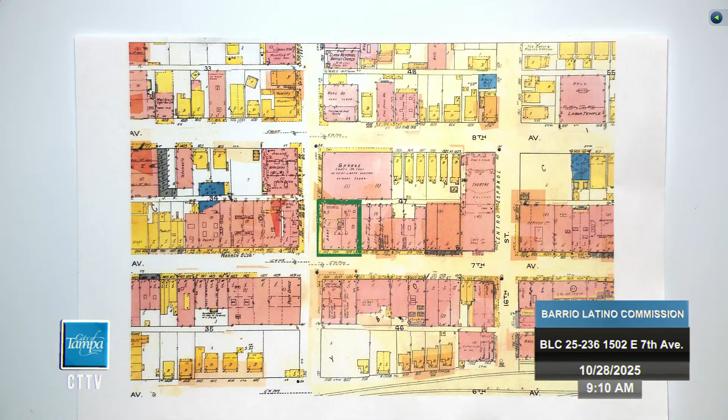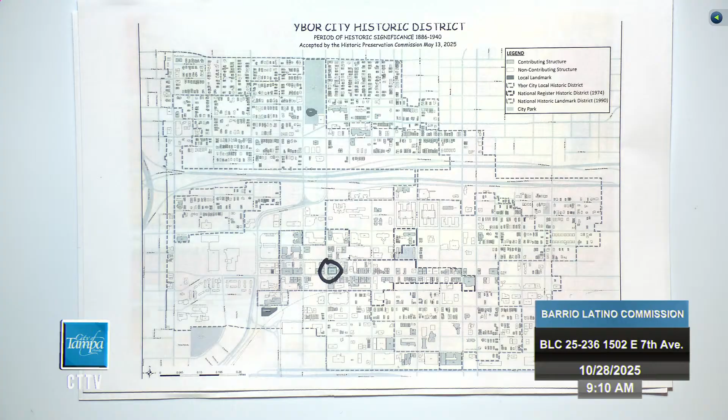Here's our vicinity map showing the concentration of the commercial core, which is highlighted in blue. Obviously, the boundaries on the outside are the local district of Ybor City. We're going to focus on the corner of 7th Avenue and 15th Street. This is just an aerial shot, you see the concentration of commercial buildings along 7th Avenue and 15th Street.

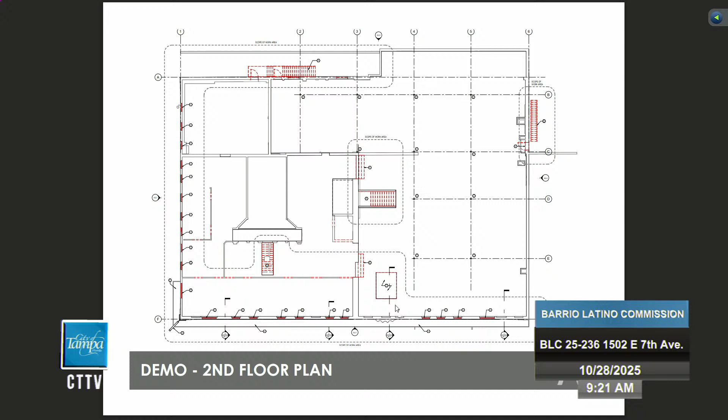The structural columns remain, but the cladding will come off. On the second floor, all the windows are being taken off and replaced. The elevator will come up, and when we go back, this is where the elevator is, right in the centerpiece.

So for the storefront, to maintain that same glass front facade, we're just going to use spandrel glass in front of the elevator, so the elevator will have spandrel glass looking at it. We talked about a lot of different colors for the spandrel glass and decided on a dark gray spandrel, because that way it just looks like that big section of windows had the lights off, rather than calling attention to it.

The entrance, so when you come upstairs, the tenants are all existing, so we are going to eat into their space, but you would come up here, go to the elevator, or go up the stairs to your space on the second floor.

The elevator comes up. The reason we chose this elevator location is very tricky. There are multiple levels of the building, so this portion right here is at one level. The original building had old light wells right here that have since been covered up, but they're at multiple different levels. The elevator being right here was just the perfect position, so we could go up to the highest level and then get a ramp down to the lower space, but it's about a 2 foot difference.

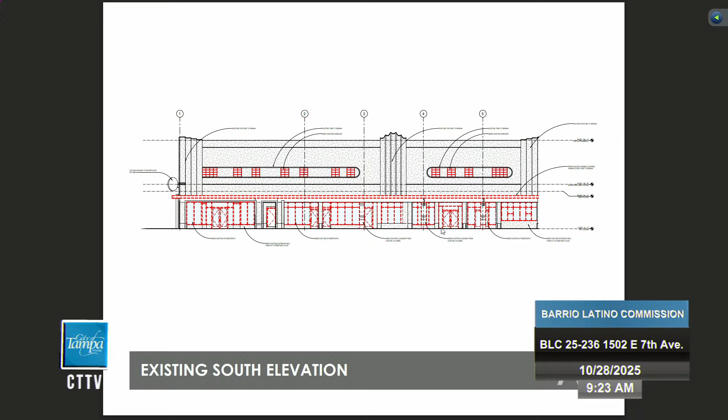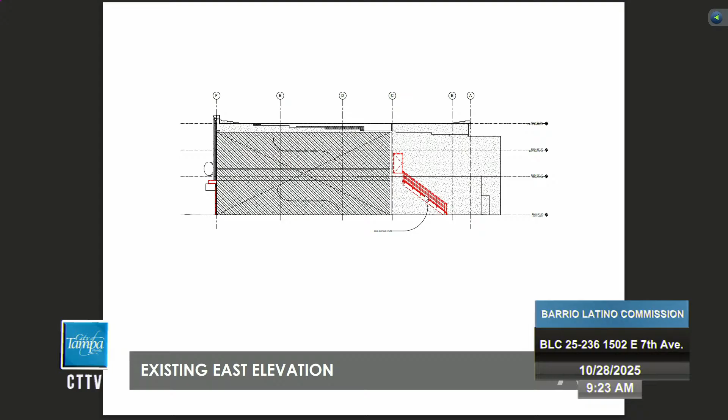We're replacing all the fenestrations with new ones because they are not in good shape. This is the building to the east of us, and this is that emergency egress stair we're going to replace. And we're going to come back to it.

These are the colors we have, and I have a whole color palette with a couple nuance changes. We are keeping the gradation in the fluted aspect, so the centerpiece of the Art Deco is actually like a curved flute - those will have the gradations. The ones that are stepped will just get a single color.

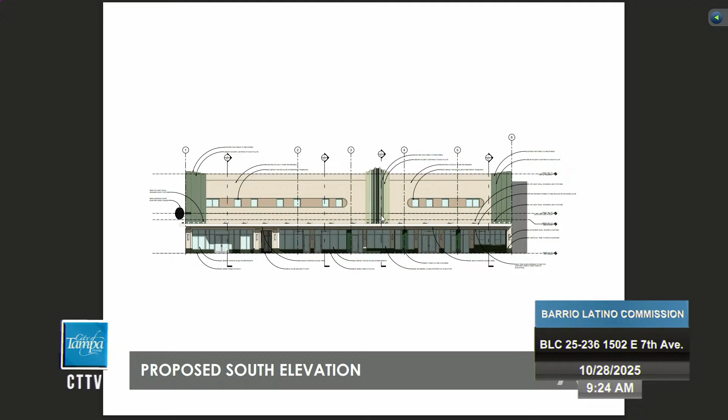We're also going to light up the vertical elements at night so you could see the difference in the steps.

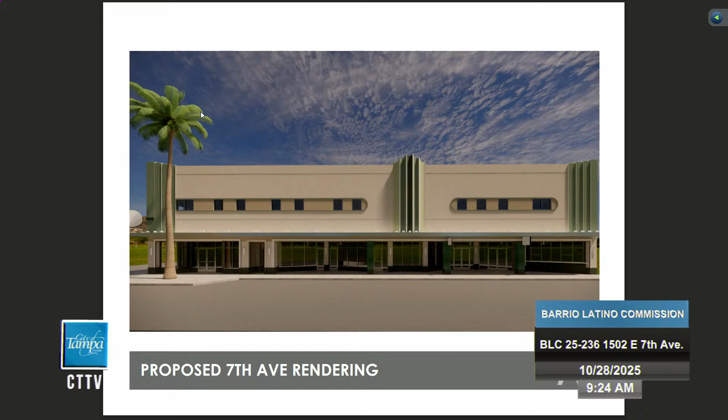And this is our proposed colors. So the banding is the same - the accent colors where we had accent colors are all going to stay the same, just newer, fresher colors, but the same kind of green hues. So the flute gets the gradation, the sides get the second color, the inset is a separate accent, and the band is the same color as the verticals.

Note the sign that Ron was talking about and all the existing signs - we're just going to take the casings off and restore them.

And then this part too, so that's the banding right here, this is the portal frames. You can see what we did as a nuance change - we put the banding all the way across. In the original design, the flute went all the way up to the awning; we're not going to do that. We're going to have the awning, and the flutes are going to stop at the trim line. The structural glass will come across, and then the stainless steel band will go across in replacement of the lights too.

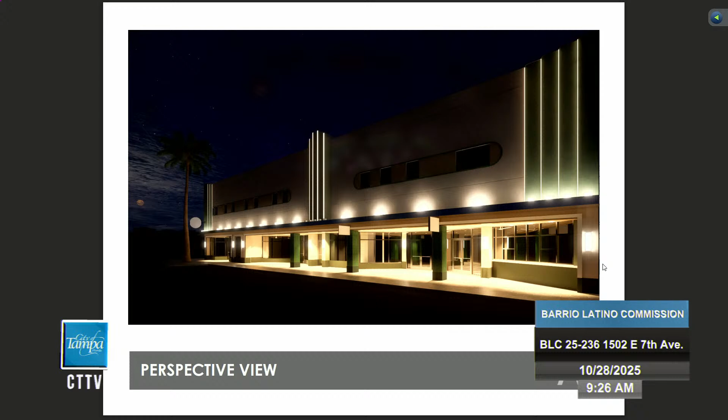And again, there's the vertical - this is it lit up at night. Part of it too is the owner thinks the alcoves at night are dark and dingy.

And when we - actually I should go back - we are going to install a security gate access right here because that is being used as a homeless bathroom. It's going to be tricky because it's going to have to tie into a fire alarm. We're going to negotiate with the fire marshal how to do it, but it's an emergency egress there.

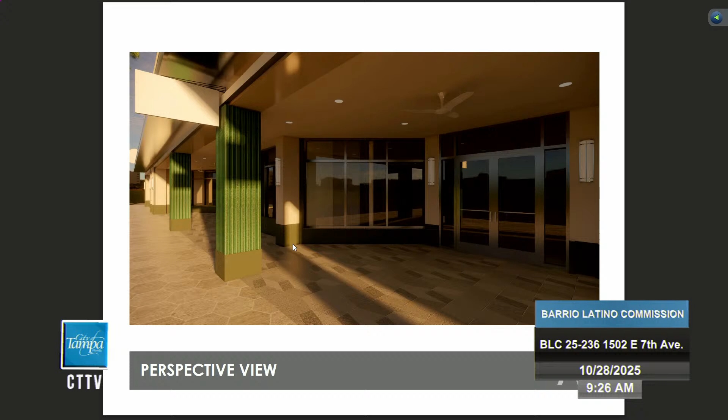However, at night there are alcoves in it and people are using them, and I'll show you that too. So this is the ground floor.

You can see what we're going to do is this is the Ybor paver here. There's a band, and then we're going to do a stamped concrete pattern that's a cubic pattern that is actually a play off of the Ybor pavers.

This flute will be replaced with a tile flute. I have a sample with me, granite base, and then we're going to redo the soffits at the top. Here this will be the banded glass. That will still be the structural glass, just with the fluted or portal frame around it.

So the elevator, this is the change we're going to make to the elevator access. This is the little security gate. There's a little alcove in the back. Unfortunately, just the way it lays out, it's not very good, and people are hiding and using it. But the storefront stays all the same.

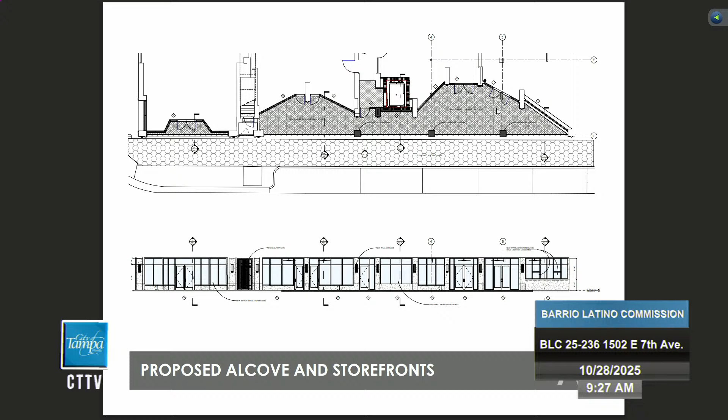Basically the same rhythm, the same pattern. So we have the top transom goes vertically across. All the doors will be consistent, clear glass. This is the pizza transom countertop.

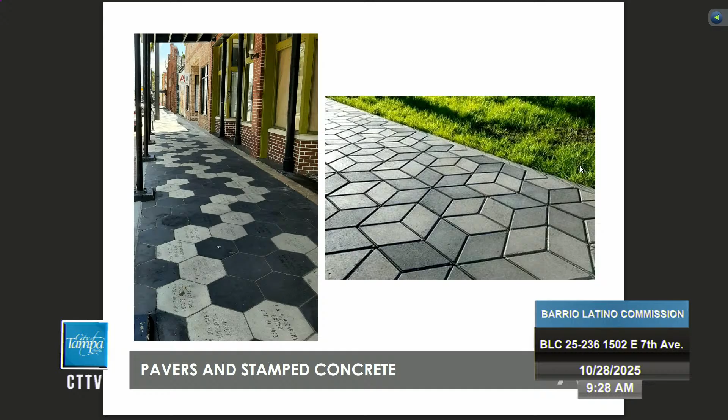And then this is the Ybor City paver, and this is the stamped concrete we're playing off of. And then when we looked around at the different alcoves and uses, this is the King Corona one. They did a white terrazzo with the band, so we have this concrete band too, and then the pavers.

Adjacent to that was one with a quarry tile, not very nice. This one, about two doors down, has another terrazzo with kind of another cubic pattern. So I feel like our stamped concrete is in line with what we're asking for.

The elevator shaft, you can see there are two levels. So the elevator goes up to the upper level. Actually, I can't remember - no, it goes all the way up to the second floor and then ramps back down to the lower level.

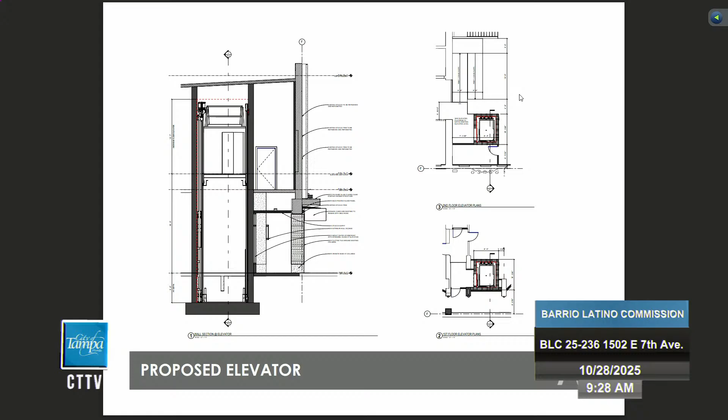And then this is the banding, that buff kind of color. It was called Vitrolite - there's another manufacturer, we don't know what it is, but it's obviously not in stock, so we're going to have to find ways. It'll probably just end up being like a back-painted glass to match or to restore it, because some of them are missing huge sections and need a lot of work.

And that's the end of my presentation.

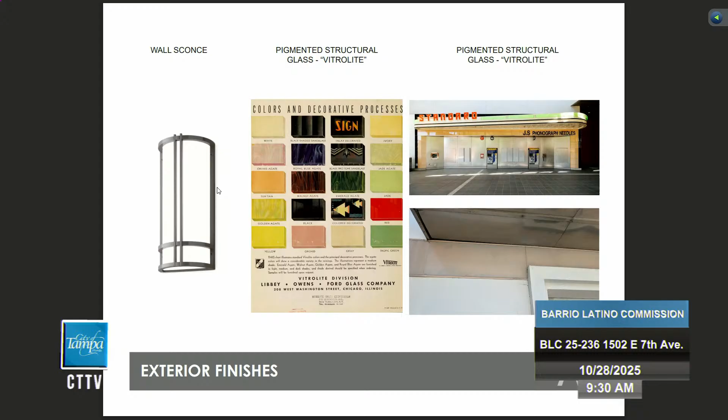On page 3 of your staff report, we have the Secretary of Interior Standards, and I just wanted to call out that this is a unique project because from the 1900 building to the 1940 building there's been a big disconnect. But through the standards, most properties change over time, and these changes that have acquired historic significance in their own right shall be retained and preserved.

So he doesn't have to go back to the 1900 building - this building can move forward per the standards. These distinct features, finishes, and construction techniques or examples of craftsmanship that characterize historic properties shall be preserved. So as part of this presentation, I think they're moving forward in that vein.

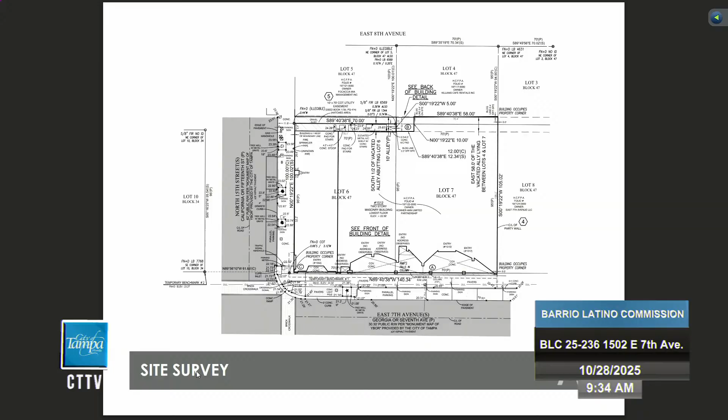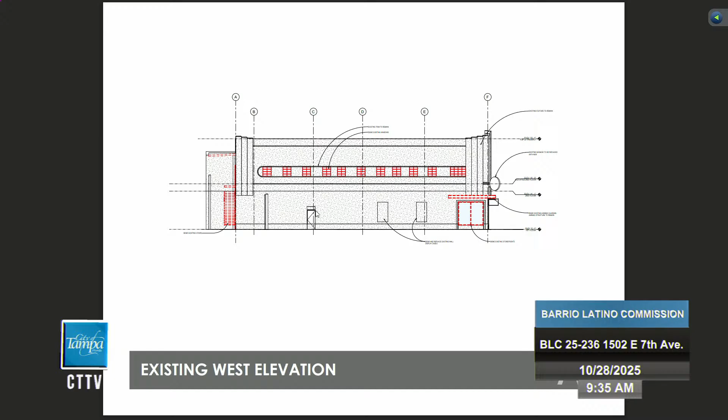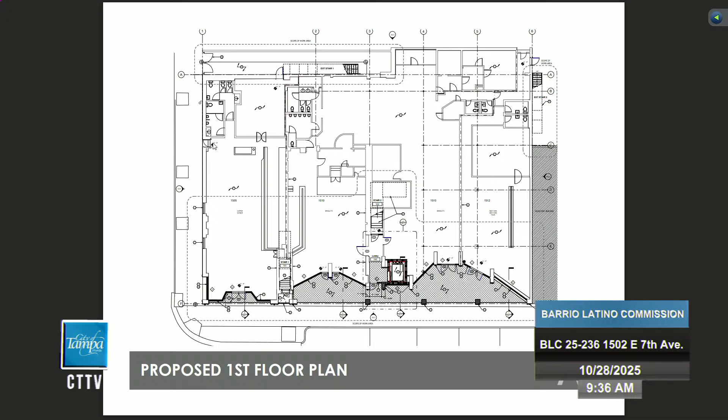And the second window — these 2 — is gone? Yeah. If you go to the north, this right here, I'm going to jump back and forth — this window right here is now that egress stair, the emergency egress out of the space. I think when they did this — sorry, I'm pointing to the wrong thing — this is where, you could see on the floor plan from the professional measuring company, I think that's where the windows were. There was a window here, a window here, and then at some point the old building comes across and comes back right about here — that's the original building. So there was a window, and now there are bathrooms essentially where those are, and an emergency egress for that portion of the restaurant or bar.

Okay, thank you. I did realize I forgot to show the fluted tile — I have a picture, but this is the tile, not the color, just the flute pattern, and it actually comes in a monolithic green. So that's the color, but that's the fluted pattern. I don't have that sample, but the manufacturer will be able to make it for us. And those columns — the current columns are definitely plastic, you can tell people poke holes in it, and that plays off the green color too. So we're trying to bring in all the historic greens from the building.

Okay, that's the end of my questions.

Could you talk about the color palette in more detail? Are you just restoring the existing colors? Because everything's faded right now.

Yeah, the colors are green, and they are gradients. I'll explain every difference. On the bottom, these aren't flutes, these are a step-back pattern - flat pieces of stucco that step back. The center one is a curved flute, and then it goes back to the step.

So if you go into my rendering, you can see the different colors. This is the field color, a fresher field color. It's a little more - it's not as white as it was, but that's just because white doesn't withstand an E-board.

There's an inset band - the green will be trimmed out, it's already trimmed out right now, it's just a newer color green. We'll have three different gradations on the flutes, and the two sides will just be a solid color. Then the Shoji white that was in there, these accent trims, will be a white color across it.

Okay, gotcha, so you're just playing off those faded greens. Yeah, restoring the original colors of the building. We obviously don't know the exact colors, but these are kind of like modern takes of what the colors were, and we went through a lot of different greens to get to this point.

For the new lights going underneath the canopy, is there any datum or anything you're following for the installation, or just head clearance? You mean the ones inside the canopy pointing down? No, the ones that are wall mounted - are those new? They're existing actually, but we are replacing them with LED.

So the ones across the top are existing. What we have is one light for every flute. The verticals get a specific uplight, one for each vertical element - there's one, two, and they go vertically. Then across the bottom is more to wash the wall.

The one below the canopy itself is new sconces - yeah, these are new. I think there are some existing ones, but it's just too dark in the alcoves, so we're adding sconces on the columns because there are too many dark spots.

And will those fans remain? Yes, but not those - those are getting replaced. We're adding extra lights in the soffit, ripping out the old ones to create a better rhythm and pattern, but it's Florida and it's hot, so we're going to maintain fans, just with a better selection, and we'll work with staff on a fan that's appropriate - I think the current one is actually an indoor fan, not meant for outside.

That makes sense. And do you have a rendering showing where the new spandrel glass would go in for the elevator? Yeah, the spandrel glass is in the rendering.

Okay, so it is just below the flutes. I'll do the rendering for these three pieces, so that will be isolated as the black spandrel, or dark gray. I don't want black, because black actually will stand out a little bit more. There's a dark gray. The goal is to make it, we had a different color, and when I talked to the owner, he was like, no, I just want it to look like it's off, like somebody just left the lights off.

And it's actually a good rendering for a question on the upper windows as well. As Ron pointed out with the historic photograph, there were operable casements. They look like they had muntins in them. These look like they're just picture windows now. The owner is very anti the muntins on it. He was like, the windows aren't there. If you look across the street at the Ritz, they just have big square windows, double hung or single hung, but his goal is just to make it clean as possible. He thinks the modern look is better with the picture window. That's his take on it.

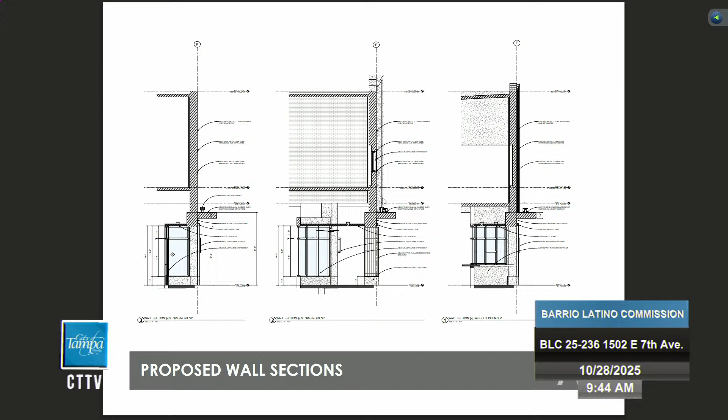And when you talk about the structural glass that's there, is that a vertical face? Yeah, it's actually vertical and horizontal at the bottom. It's on that soffit. It's missing from all the bottom pieces. So it's mostly vertical, right, on this spot. You can see that, and we're going to maintain that exact kind of look on it. And it's on, where's the, sorry.

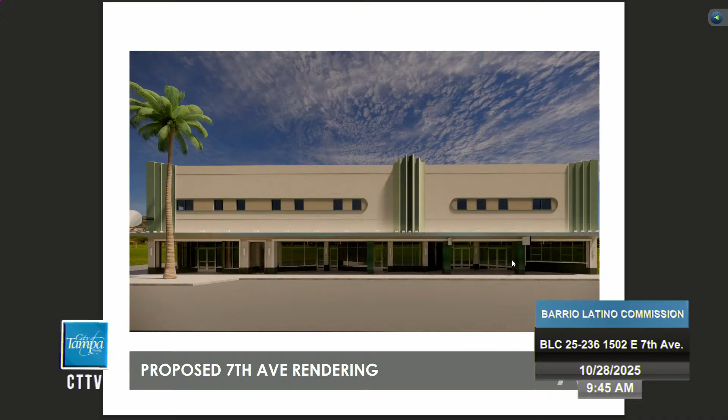Yeah, a lot of photos, sorry. Okay, right there, that's where it was on the vertical, not on the horizontal. But that failed, it's missing.

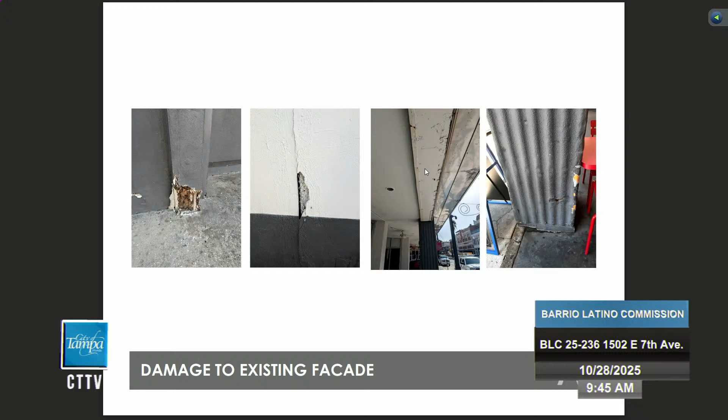It clearly failed, so we're gonna restore it. I think for the most part you don't have much of that spot left because we're gonna replace it with a portal frame. The portal frame is probably a better structural solution, and it actually balances out, because right now I don't understand why one went up and just stopped. I mean, it's Ebor, so that's probably why.

Okay, my question is, is it gonna be lit or not lit? I don't believe those are actually lit right now. Are they lit? Oh, they are lit, okay, sorry, I apologize, they are lit. So you'll go back to the same? Yeah, we'll go back to the same.

Okay, and talk about the awning a little bit more. I understand that you're gonna remove the cladding, repair, replace as needed. What's the structure underneath that? Is that steel or is it wood?

We don't know yet, so that's part of what, when we talk to the city, it is in the right of way. So it goes over, and there is an easement agreement with the city. So they said, when we talk to them, if you replace it we're allowed to reclad it. If we take it off, we're allowed to put it back on, but we have to put it back on as a removable element for maintenance.

I don't know what it is. We probed into some of the columns, I think it's a mix of wood and steel. There is a lot of steel in the building. We can't get into it yet, so when we clad it, we'll have to look at it.